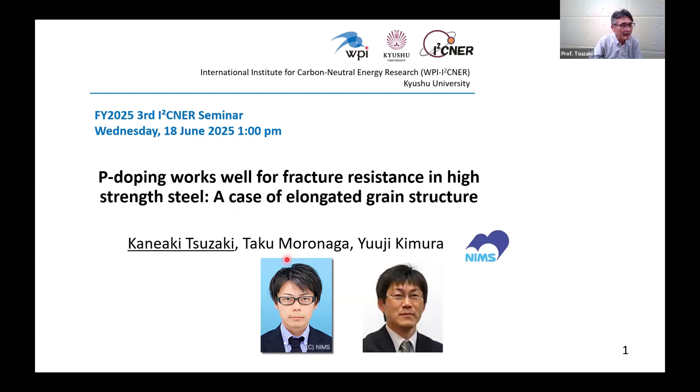The title of my talk today is Phosphorus doping works well for fracture resistance in high-strength steel, a case of elongated grain structure. The co-authors of this presentation are Moronaga-san and Kimura-san. Phosphorus, an embrittlement element in steel, can also be used as an effective element if the microstructure of a steel is controlled. This is the message of my talk today.

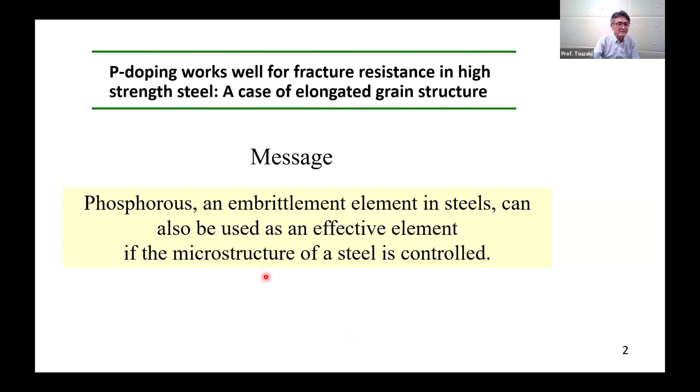Agenda: 1. Background and motivation. 2. Seasoned ideas. 3. Challenging impact toughness. 4. Challenging hydrogen embrittlement. 5. Related Japanese steel research project. And 6. Concluding remarks.

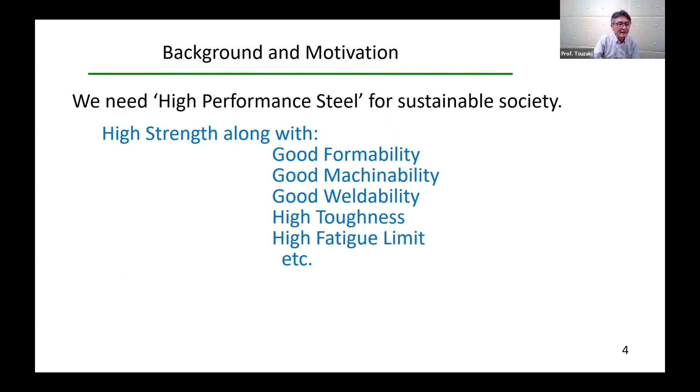Background and motivation. We need high-performance steel for sustainable society. We need high strength along with good formability, good machinability, good weldability, high toughness, high fatigue limit, etc. Today's topic is toughness and embrittlement.

This is a textbook of Professor George Krauss. Chapter 19 of this book discusses low toughness and embrittlement phenomena in steels. On page 382, it is written that toughness is the term used to describe the ability of a steel microstructure to restrict fracture. Embrittlement implies a processed microstructure condition that creates lower toughness than expected of a steel.

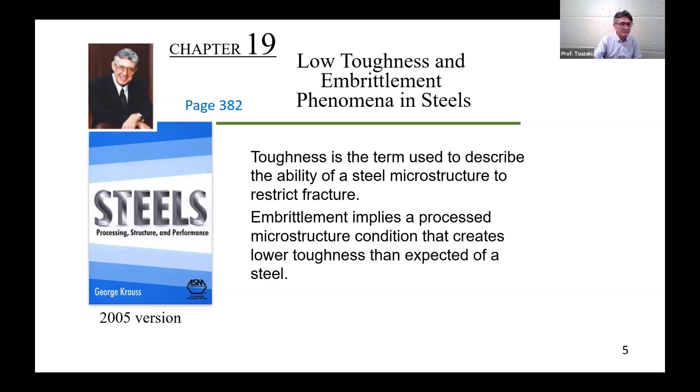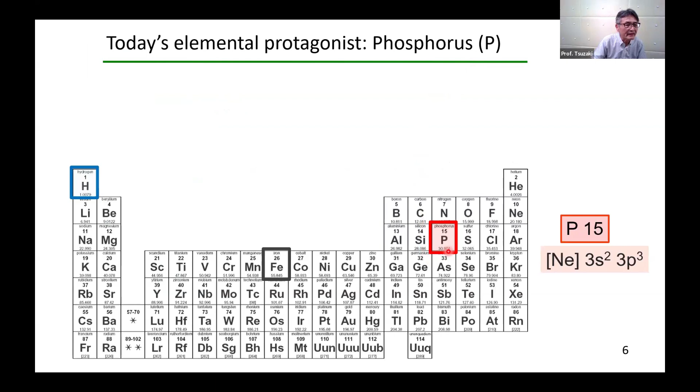Today's elemental protagonist, the main player, is phosphorus. In the periodic table, phosphorus is located below nitrogen. It is well known that phosphorus P, a chemical constituent of steel in JIS standards, is treated as one of the harmful elements affecting low temperature impact toughness, low temperature brittleness, weldability, cold workability, and impact properties. Thus, for example, the maximum P content in JIS SCM 440, AISI 4340, is strictly specified as 0.030 weight percent, 0.054 atomic percent, for safety.

Here is Professor Krauss's textbook again. Chapter 19 describes many embrittlement phenomena. The eighth of these is the embrittlement by P, which is tempered martensite embrittlement. On page 398, we can find a figure like this.

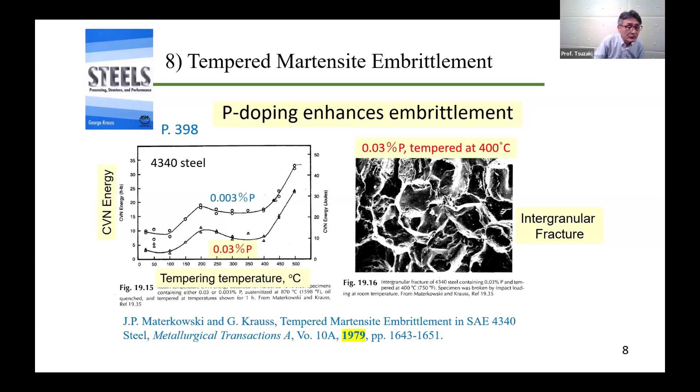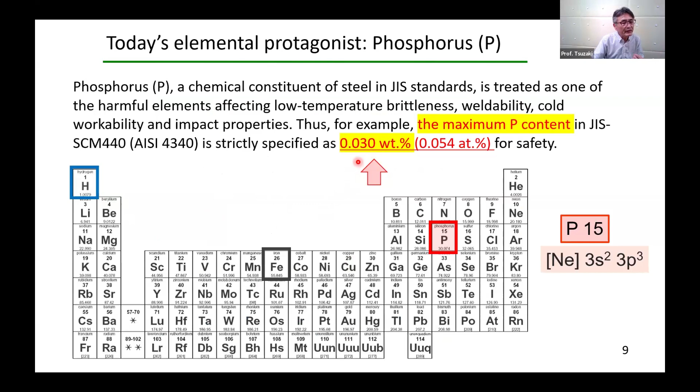For this amount of 0.03% P, if you go back to the two previous slides, you see that 0.03% is the maximum P content in JIS SCM 440, AISI 4340. This fact and the result shown in Professor Krauss's text led me to the following question: how does toughness change when P is greater than 0.03 mass percent?

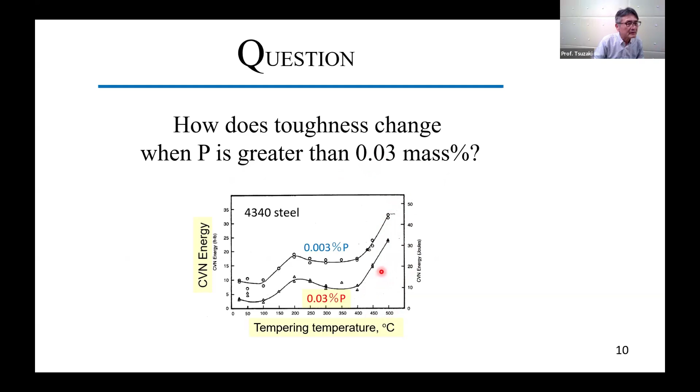I wanted to know the result for high temperature tempering above 500 degrees Celsius, where the impact energy rises. I believe you all would like to know too. So I did. Here is the result. Only phosphorus content was varied in SCM 440. The tempering temperature in this case was 550 degrees Celsius, and the tensile strength was 1100 MPa.

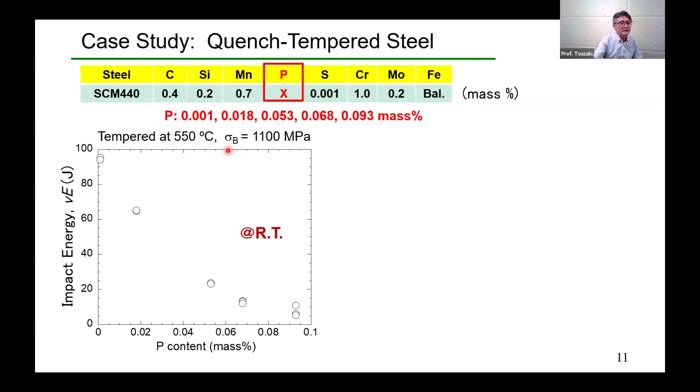The impact energy at room temperature shows more than 90 joule when the P content is 0.001%. And the fracture surface shows dimple fracture. Impact energy decreases markedly with increasing P content like this.

At 0.093% P, almost complete intergranular fracture is observed. Here, I should say that even after high temperature tempering, embrittlement due to P is still pronounced.

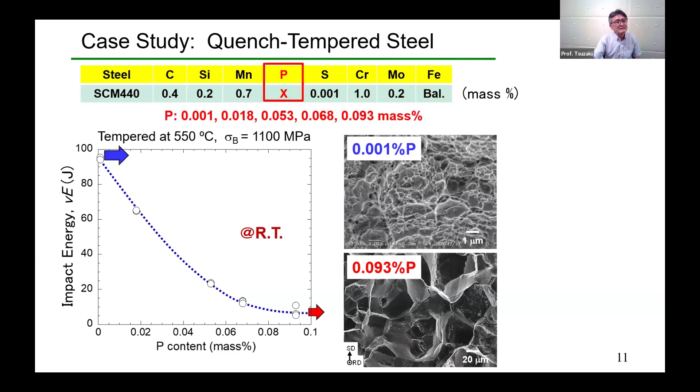We also did an Auger electron spectral analysis to confirm the segregation of phosphorus at grain boundary. In the grain boundary fracture area, we observed about 3 atomic percent P, which is 40 times the average value.

The lower content of P at number 10 and 12 shown in red square corresponds to cleavage fracture region like this. Interestingly, these regions also have a high phosphorus content of 1 atomic percent or more.

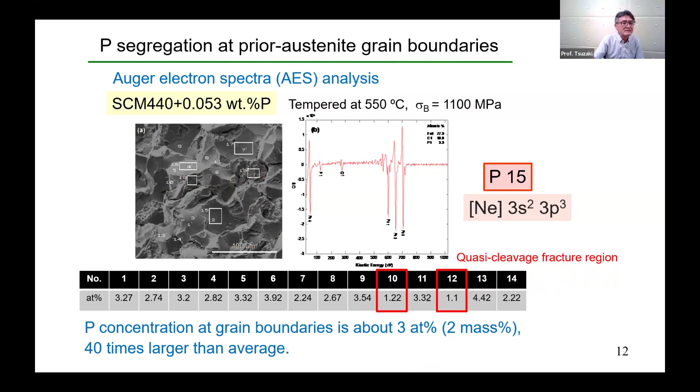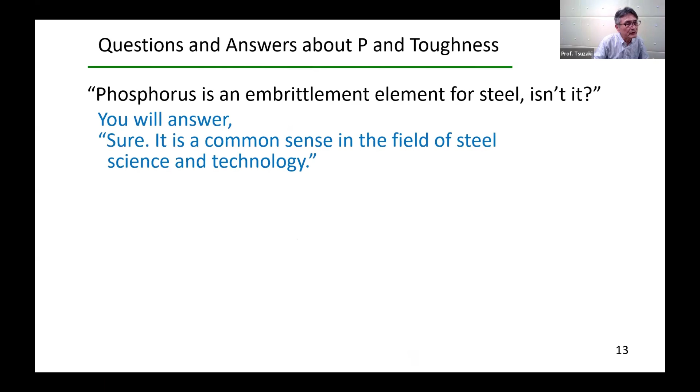Based on the knowledge and background I have described so far, here I'd like to do a virtual Q&A on phosphorus and toughness. First question: phosphorus is an embrittlement element for steel, isn't it? You will answer, sure, it is a common sense in the field of steel science and technology.

Second question: can you make a steel tougher by phosphorus? Your possible answer is no, we cannot. We can make a steel stronger by phosphorus - this is solution hardening by phosphorus. However, toughening by phosphorus is impossible since phosphorus is an embrittlement element.

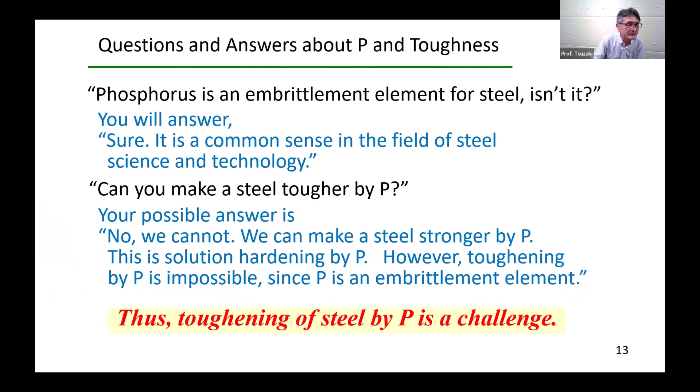Therefore, toughening of steel by phosphorus is a challenge. So it was a long introduction on background and motivation. Next up is theories and ideas: how to improve toughness of a high-strength steel by the embrittlement element phosphorus, P.

Let me briefly describe our scenario according to Professor Cohen's reciprocity diagram. Processing is temp-forming. Structure is ultra-fine elongated grain structure. Properties are high toughness and strength. And performance is safety and eco.

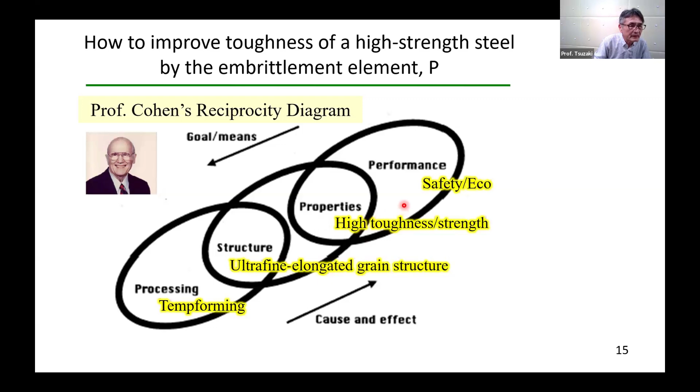Our scheme and idea is in the use of delamination toughening. We published a research study in 2008 with this title: Inverse Temperature Dependence of Toughness in an Ultrafine Grain Structure Steel.

Here are the main results. The steel is 0.4 carbon, 2 silicon, 1 chromium, and 1 moly, and tensile strength is 1800 MPa. The QT material shows a normal ductile to brittle transition with low impact energy values as shown here.

However, for material subjected to temp forming TF, the method of which will be shown in more detail later, the impact energy is higher. And as you can see here, impact energy increases with decreasing test temperature.

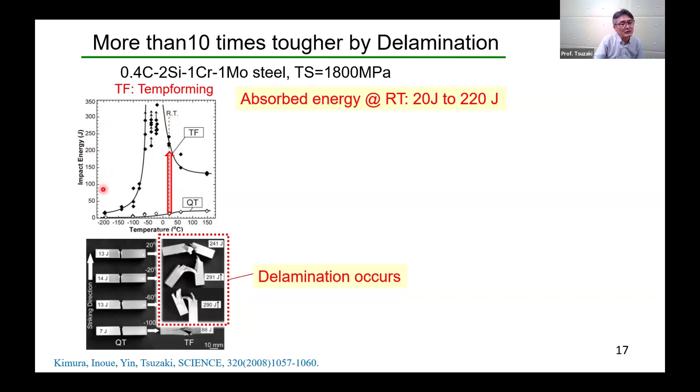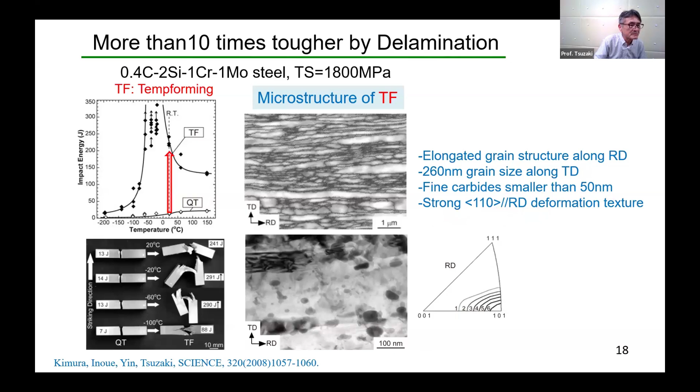We have studied the mechanism of delamination toughening: interaction between weak interface and stress sigma SD, striking direction, that is generated by plastic constraint at the notch root can make delamination.

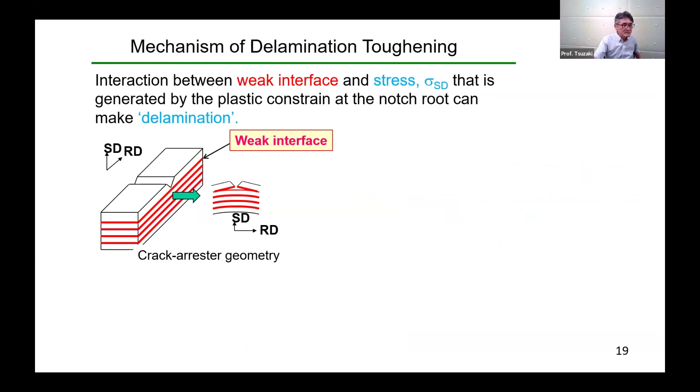When the delamination with a crack arrestor geometry occurs, as shown in the left figure, the triaxial tensile stress state is relaxed toward a uniaxial tensile state, which lowers the DBTT and increases the impact energy. This means that we can use brittle fracture to enhance toughness in ultra-high strength steel with an anisotropic structure.

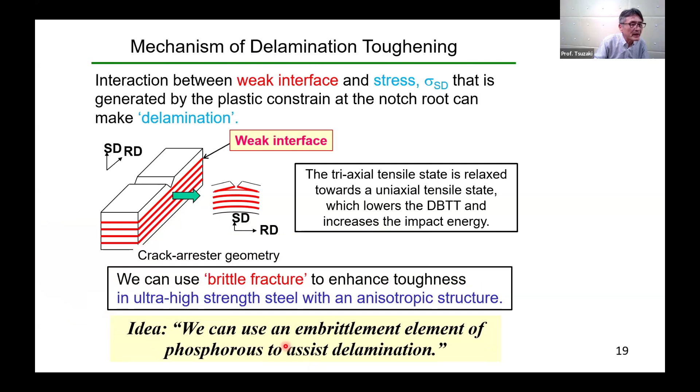What kind of an idea will come out of this? Yes, this idea: we can use an embrittlement element of phosphorus to assist delamination.

Next, the challenge - impact toughness by P-doping is presented. The steel used is SCM440.

Only P content was changed from 0.001, 0.018, 53, 68, and 0.093 mass%. The main process is multi-pass caliber rolling at 500 degrees Celsius, namely warm rolling of tempered martensite.

The total reduction area of 78% produced a bar with a cross-section area of 14 millimeters square, and the bar was finally annealed at 550 degrees Celsius for 1 hour.

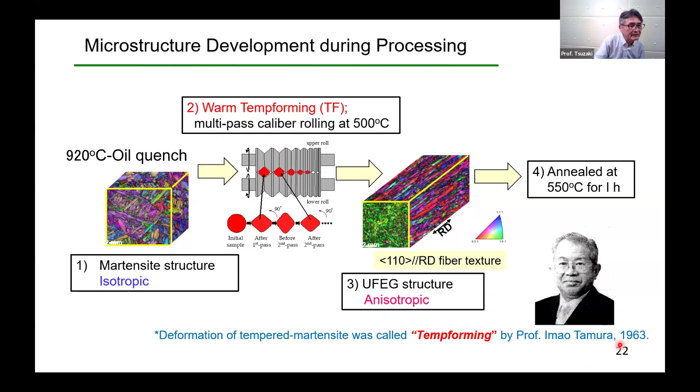In TF sample, elongated fine grain along the rolling direction are seen. Inverse pole figure shows a strong 110 parallel RD fiber texture. The SEM microstructure of TF shows the carbides are spherical and aligned in the RD direction.

As mentioned earlier, the carbides aligned on grain boundary are also a factor in delamination. One thing to note here, although the microstructure are not shown on this slide, P addition up to 0.093% does not show significant effect on microstructure of the QT and TF samples.

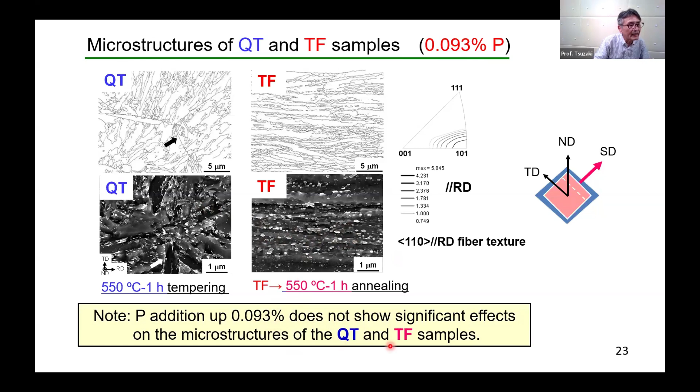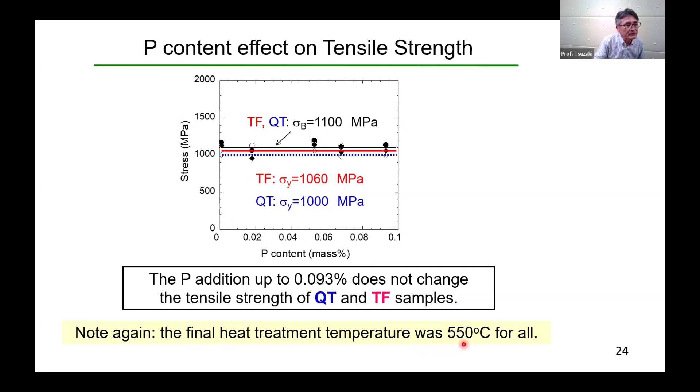Next, phosphorus content effect on tensile strength is shown here. The P addition up to 0.093% doesn't change the tensile strength of QT and TF samples. It is reasonable since the microstructure isn't affected by P doping, as I said in the last slide. Note again, the final heat treatment temperature was 550 degrees Celsius for all.

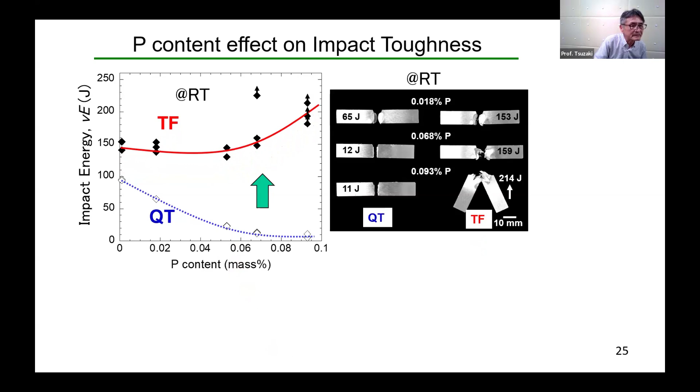Now, this slide shows the result of the impact test that you have been waiting for. As shown in the introduction, the impact energy decreases monotonically with increasing P content in the QT material. On the other hand, in TF material, impact energy increases as P content increases, especially at P content more than

0.05%. In the TF 0.093% P, significant delamination still occurs as expected.

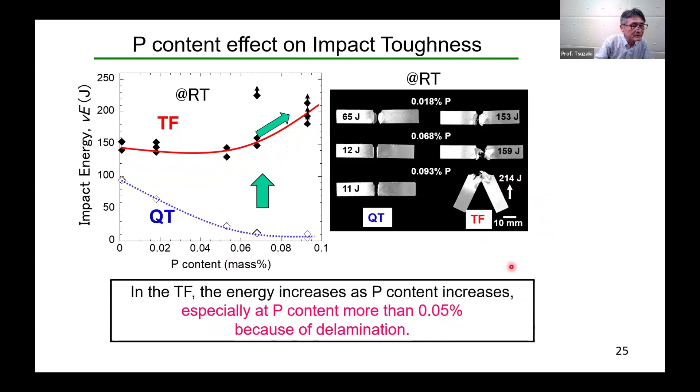Tsujiyama-sensei, is it okay? Yes, no problem. Anything wrong? It's all right? Okay. Yeah.

Let me continue. So this slide, number 26, shows fracture surface of the 0.093% P steel. The intergranular fracture occurred along the boundary of the prior austenite grains of the QT sample.

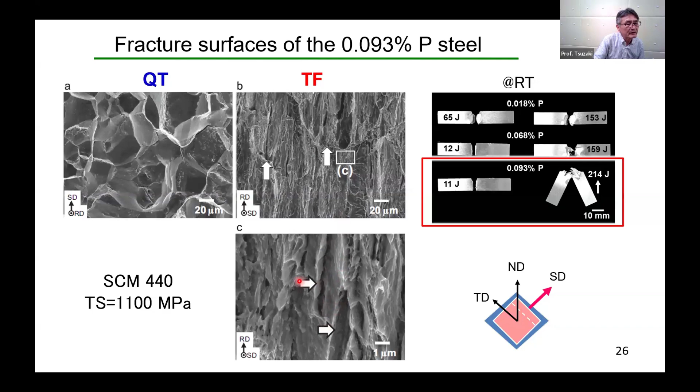In B and C, you can see SEM micrograph of delamination plane of the TF sample. Fracture mode of the delamination planes is characterized as a mixture of quasi-cleavage and intergranular fracture indicated by arrows like this.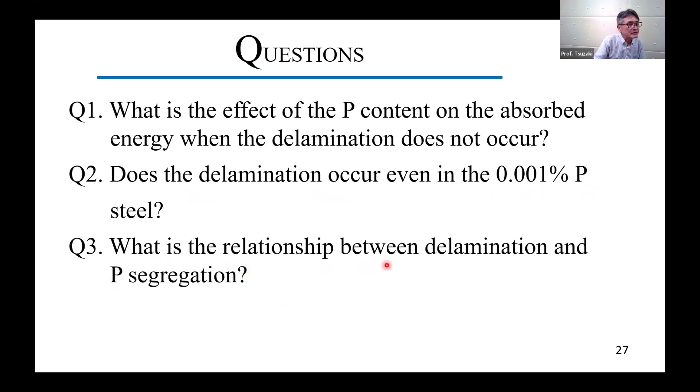Now that you have seen the results so far, you may have these questions. Q1, what is the effect of the P content on the absorbed energy when the delamination doesn't occur? Q2, does the delamination occur even in the 0.001% P steel, high purity steel? And Q3, what is the relationship between delamination and phosphorus segregation?

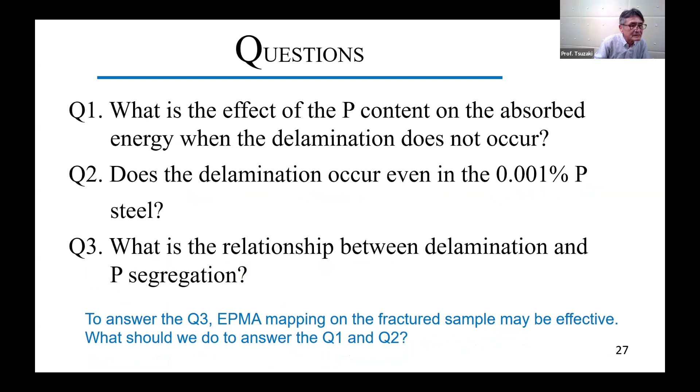To answer Q3, EPMA mapping on the fractured sample may be effective. But what should we do to answer Q1 and Q2? The clue is on the previous slide, number 17. As shown here, delamination doesn't occur at high temperatures and is accelerated at low temperatures.

Therefore, to answer question 1, we can do the impact test at high temperature. And to answer Q2, we should do the test at low temperature. So all we have to do is to get the Charpy impact curve of the impact energy of the TF and QT sample with different P content.

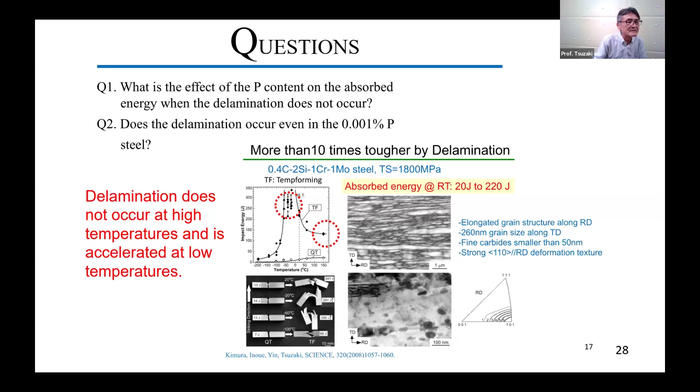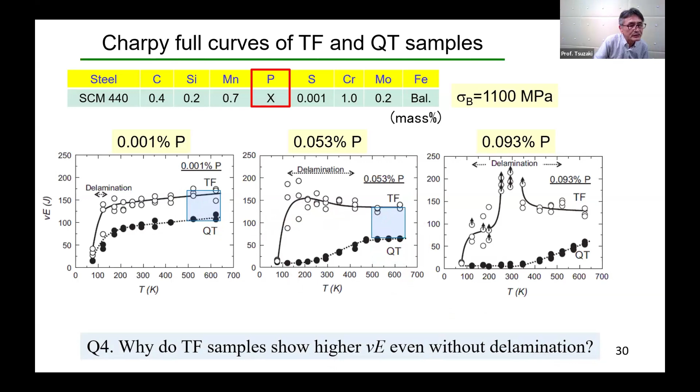This is the answer to question 1. Here, you may have a further question. Q4: Why do temp-form samples show higher energy even without delamination, in the upper shelf portion? I think that the reason must be associated with the strong 110 RD texture and the unique carbide arrangement in the microstructure. I'll further discuss this in the discussion time if you want.

But now we need to concentrate on question 2. Does the delamination occur in the 0.001% P steel? The answer is yes. It was found at low temperature here.

I show you the delamination occurred at -150 degrees Celsius in 0.001% P TF steel. Here, there is not significant segregation of P. So the possible factors for weak interfaces are 001 cleavage plane aggregate, unique carbide arrangement, and maybe also manganese segregation bands.

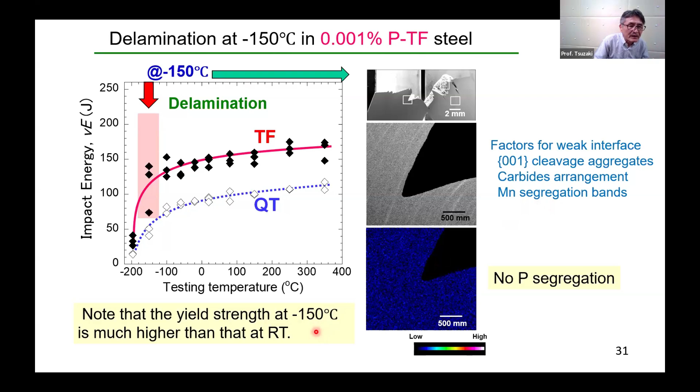I should note that the yield strength at -150 degrees Celsius is much higher than that at room temperature, where the applied stress is the driving force for delamination. I think we have almost solved Q1 and Q2. How about you guys? Okay?

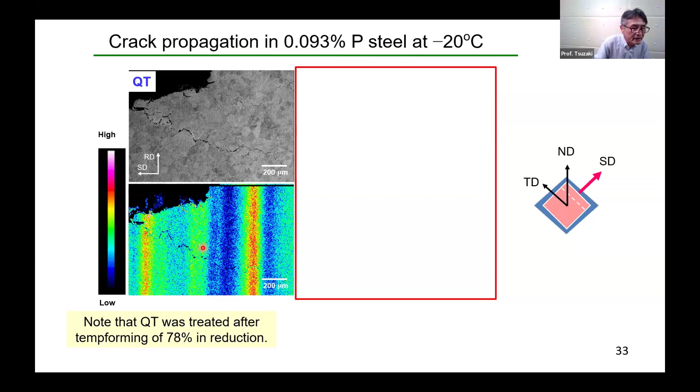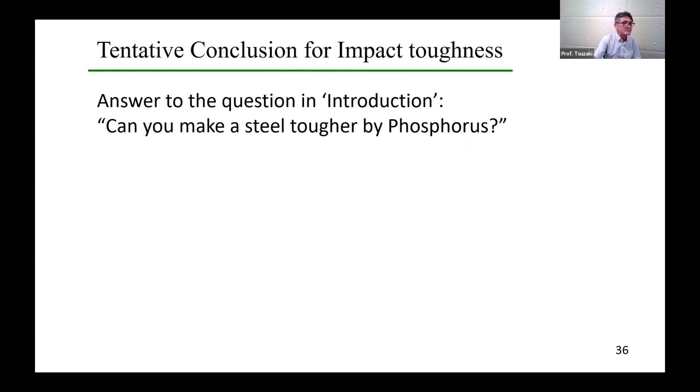So then we make a tentative conclusion for impact toughness, answering the question I made in the introduction: Can you make a steel tougher by phosphorus? The answer should be, yes, we can. We can make a steel stronger by phosphorus through delamination toughening in an ultrafine elongated grain structure. This is a case study of positive use of an embrittlement element, phosphorus, in steel through microstructure control.

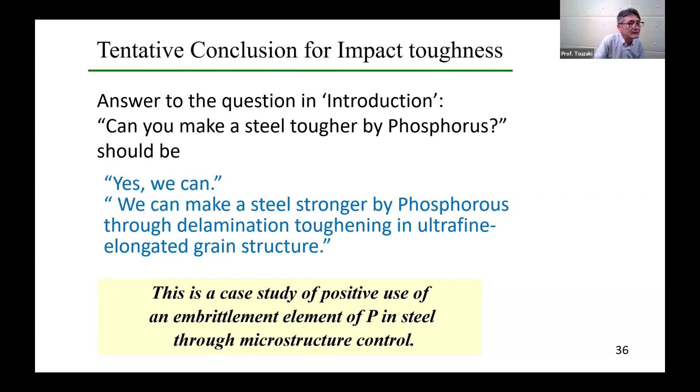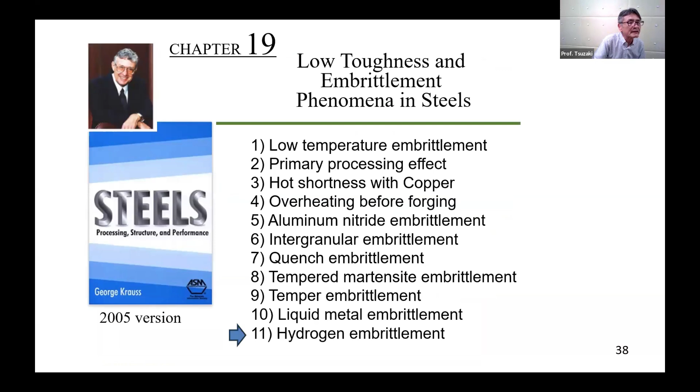Since there is an incubation time before failure, this fracture was named delayed fracture. It had been discussed that the incubation time to fracture corresponds to the time required for hydrogen atoms to diffuse and accumulate to a critical value for failure in the stress concentration region at the notch root.

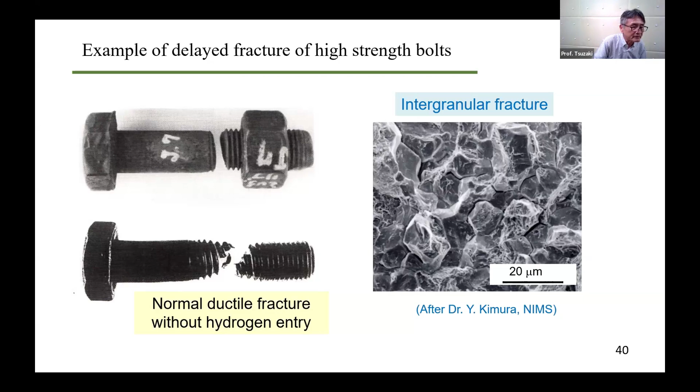We have ideas for overcoming hydrogen embrittlement. The first is again tempforming and the ultrafine elongated grain structure.

In 2012, we reported that the TF sample shows higher strength than QT in the whole range of hydrogen content up to 3 ppm, as shown in this figure. The result was obtained in this high carbon, low alloy steel with a very low level of phosphorus and sulfur.

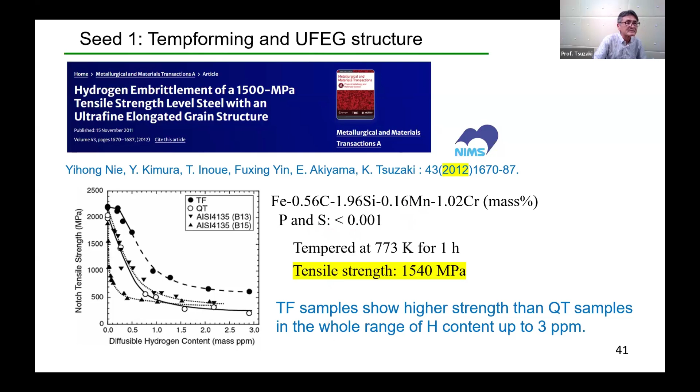What I think is important about their result is this: delamination cracking occurs at the notch root, as shown here in C. Please look at the EBSD inverse pole figures in A and B, where delamination cracks propagate along the pearlite block boundary, namely the boundaries between the red and blue regions shown in B.

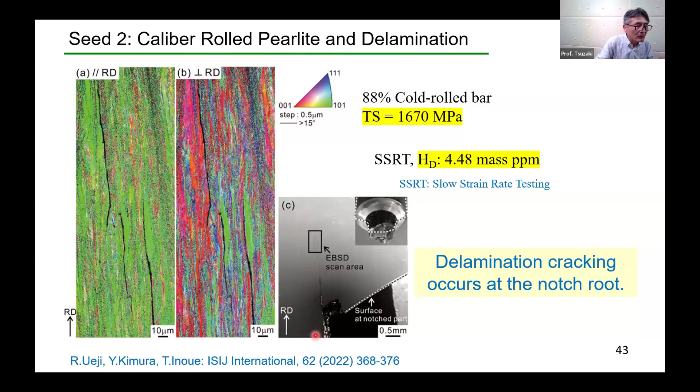This delamination should be reducing the stress concentration at the notch root, which is good for hydrogen embrittlement resistance. This brings me to the idea I think you all know what my idea is. Yes, my idea is P-assisted delamination for delayed fracture.

In this study, we used the same SCM440 with two different P contents. We used only two levels of P: 0.001, the high purity one, and 0.093 mass percent, the highest P content. The tempforming process is exactly the same as that of the first half of my presentation today.

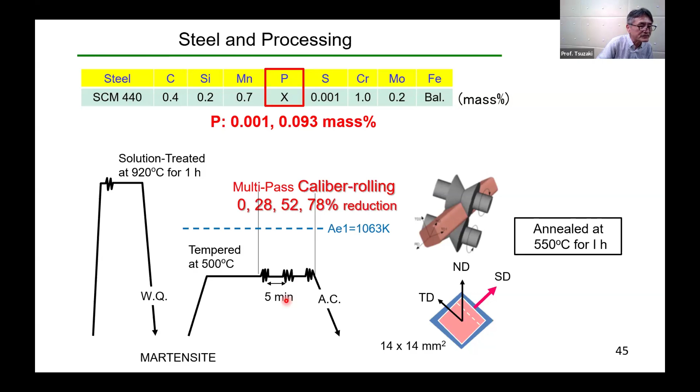This is the experimental method used to evaluate the hydrogen embrittlement susceptibility. It is the SSRT test we always use.

First, hydrogen charging for 164 hours with these solutions with various current density. Second, a slow strain rate test was performed at a cross-head speed of 0.005 millimeter per minute. Finally, we did thermal desorption spectrometry, TDS, at a heating rate of 100 degrees Celsius per hour. Hydrogen desorbed up to 300 degrees Celsius was regarded as diffusible hydrogen, HD, which caused hydrogen embrittlement.

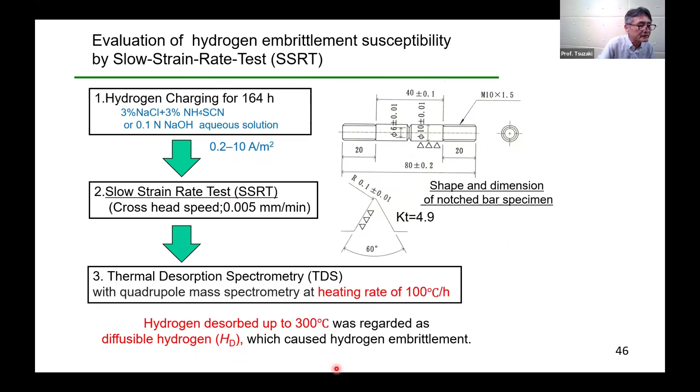This slide shows the result for the notch tensile strength versus diffusible hydrogen content. In low-P QT steel, shown in black, the notch strength decreases from 1800 megapascal to 400 megapascal as hydrogen content increases, like this.

The notch strength of high-P QT steel in blue is lower than that of low-P QT steel in black. However, high-P TF temp-formed steel in red shows higher notch strength than the QT steels. The strength is still higher than 1000 megapascal, even at a high hydrogen content of 3 mass ppm.

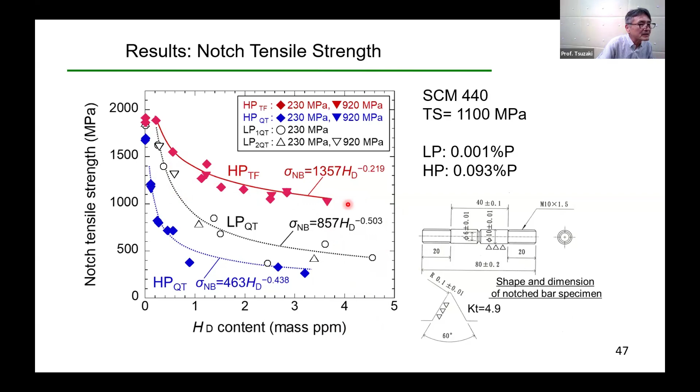This is the result of SEM fractography of the QT sample. In QT, 0.093% P steel, grain boundary fracture was observed at the crack initiation site, even without hydrogen charging.

On the other hand, in QT, 0.001% P steel without hydrogen charging, although it isn't shown here, dimple fracture was observed in all regions of the specimen. As hydrogen content increased to 1.4 and 2.5 ppm, the ratio of quasi-cleavage fracture and intergranular fracture at the crack initiation site increased, as shown in D and H.

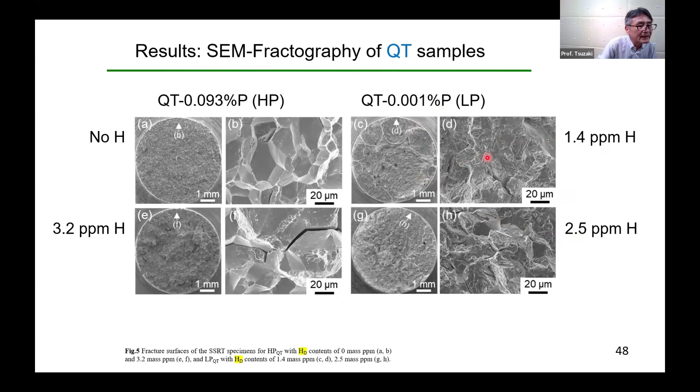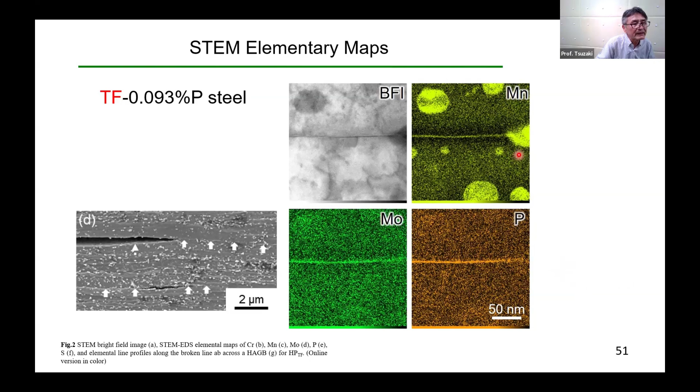I believe it is clear that phosphorus segregation at the grain boundary is related to delamination fracture because of loss of cohesion. However, the effect of moly and manganese segregation are still under discussion.

Now, at this stage of my talk for the second topic, you may all have this question, Q5: what are the hydrogen intrusion properties of TF steel? This is a very reasonable question since it is essential for discussing hydrogen embrittlement resistance of a steel.

To answer Q5, we performed the immersion test to evaluate hydrogen intrusion. The test was done at 30 degrees Celsius with a solution here. This condition simulates the atmospheric corrosive environment in Okinawa, Japan. The hydrogen content is lower in high P steel, 0.093% P, indicating that P doping is effective to suppress hydrogen intrusion.

I believe this is maybe due to the intergranular segregation of P.

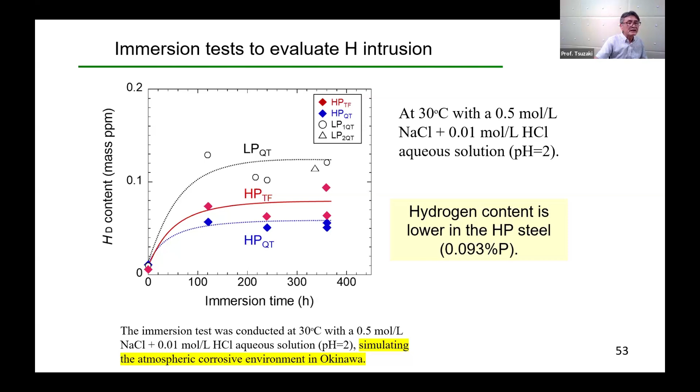Now let us examine the relationship between the amount of hydrogen intrusion from the environment, left figure, and the notch tensile strength, right figure. Even if we take a safety factor of 5 for hydrogen intrusion, hydrogen intrusion of 0.5 ppm HD, a design strength of 1500 MPa can be used for HPTF steel. Of course, further research is needed, but I think this design guideline is very interesting.

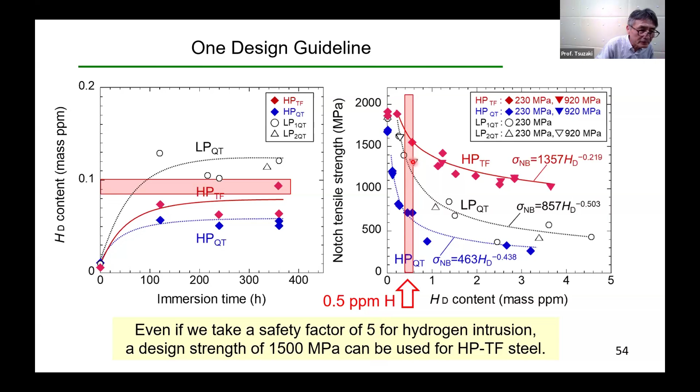Now, the tentative conclusion for HE resistance: answer to the question in the introduction. Can you make the steel tougher by phosphorus? Should be, yes, we can. We can make a steel stronger and tougher by phosphorus through delamination toughening in ultrafine elongated grain structure. This is again a case study of positive use of an embrittlement element, phosphorus, in steel through microstructure control.

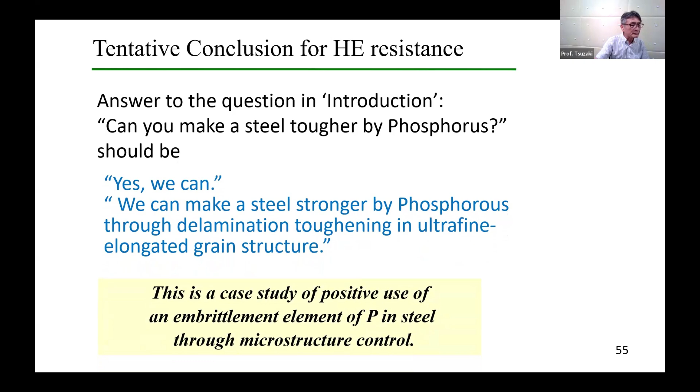Let me introduce briefly the related Japanese steel research projects before making concluding remarks. There are 2 projects that I wanted to introduce.

The first one is JST CREST, Creation of an Innovative Function of Intelligent Materials on the Base of Element Strategy. The research period was from 2010 to 2017, a completed project, and the research supervisor was Professor Kohei Tamao. In this CREST program, there was a research project entitled Light Element Strategy in Advanced High-Strength Steel, and the leader was Professor Tadashi Furuhara.

The aims were to create new principles in the design of high-strength and high-ductility toughness in steels by understanding the fundamental functions of alloying elements. One of the tasks was the use of localized alloying elements at defects, an important factor of solute-defect interaction. In this research task, I have performed the p-doping study to improve impact toughness that I presented today.

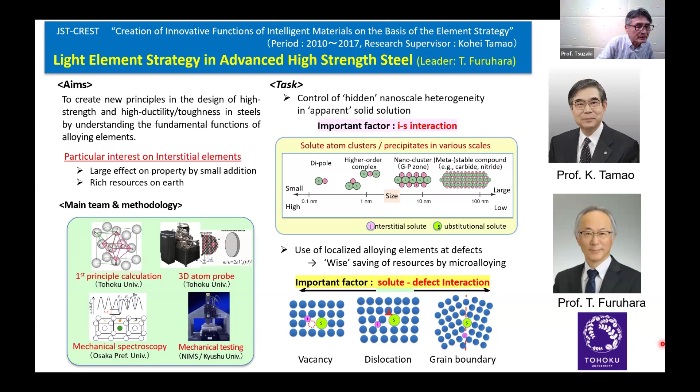I thank our leader, Professor Tadashi Furuhara, and all team members for their cooperation at the time. This is the other representative output of the CREST project except for the B-doping study. I will not explain the content here, but will leave it on the video slides for your reference. If you are interested, please take the time to watch the video later.

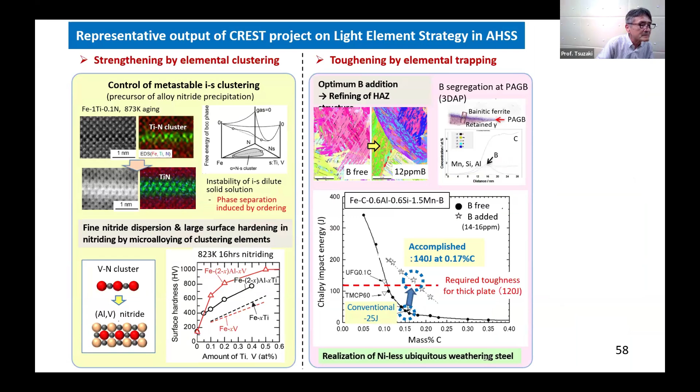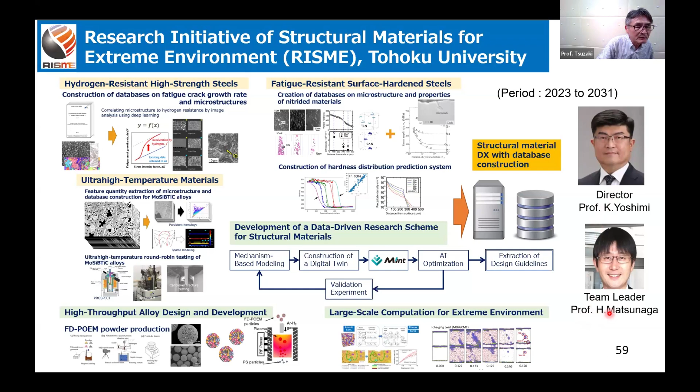The team leader is Professor Hisao Matsunaga, Kyushu University. The second B-doping study we presented today was done as work of this material challenge. I thank Professor Yoshimi and Professor Matsunaga and all team members for their collaboration.

This is one of the distinctive activities of this project: collaboration with industry, an academia-industry consortium for utilization of RISME data, with 17 companies in total now. Please go to the RISME website if you are interested.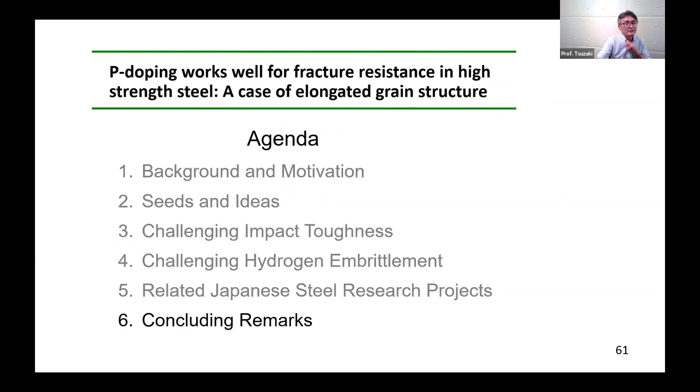Now, this is the time for concluding remarks. As one of the concluding remarks I would like to make, here I'd like to mention the most interesting future research for me.

Since the delayed fracture experiment of TF material was done only with 0.093% P steel, I have a question and interest: how does the delayed fracture strength of temp-formed material change with the P content?

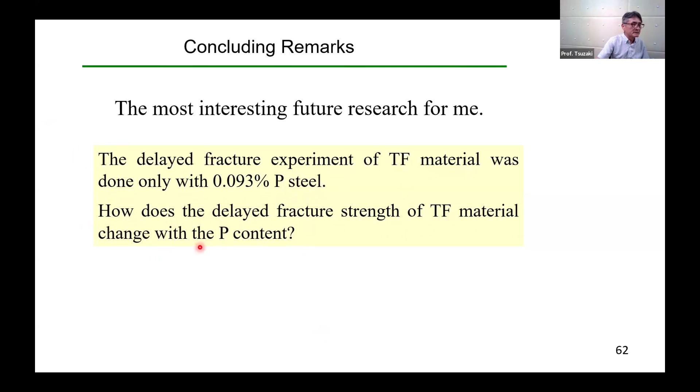In closing, I'd like to present my message again: phosphorus, an embrittlement element in steel, can also be used as an effective element if the microstructure of the steel is controlled.

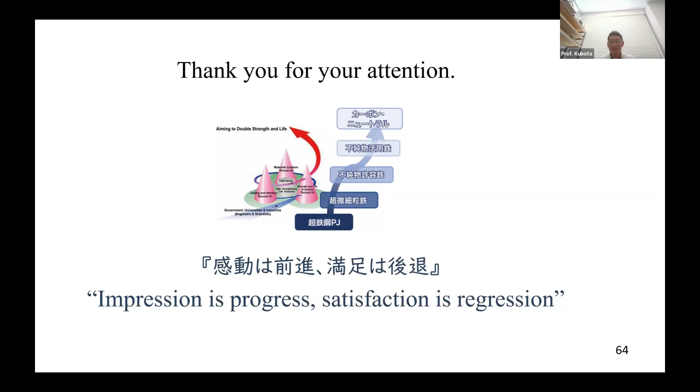Thank you very much, Tsuzaki sensei, for your very interesting talk on the P-doped steel. I have a question: in your experiment, the microstructure is controlled by thermomechanical treatment, but the loading condition is also controlled, specifically the loading direction, to achieve good results. If the lamellar material receives loading along the lamellar direction, what happens? I expect the toughness is significantly reduced. Am I correct? Yes, you are correct, absolutely. This is the anisotropic microstructure.

Okay, thank you very much. Actually, if you tensile the specimen along TD or ND direction, in series connection on the phosphorus band, the specimen fractures just after the yield point, very brittle.

Okay, thank you very much. Also, today your talk is primarily related to impact test, but how about the fatigue properties of this material? Is it also improved?

Professor Kubota, I'm sorry but I can't remember completely. We did some research on fatigue. As for the effect of microstructure on the fatigue limit region, I mean the low stress region, high cycle fatigue and low cycle fatigue, the effect is different.

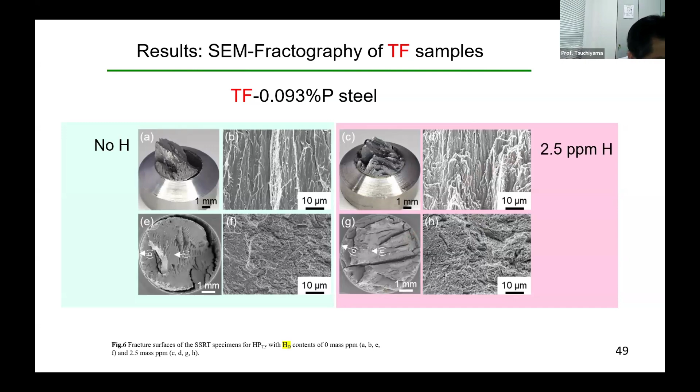Direction of elongated grain - you can see these steps, right? On these steps you can see dimples in some portion. Let me see the EPMA mapping, no, not here.

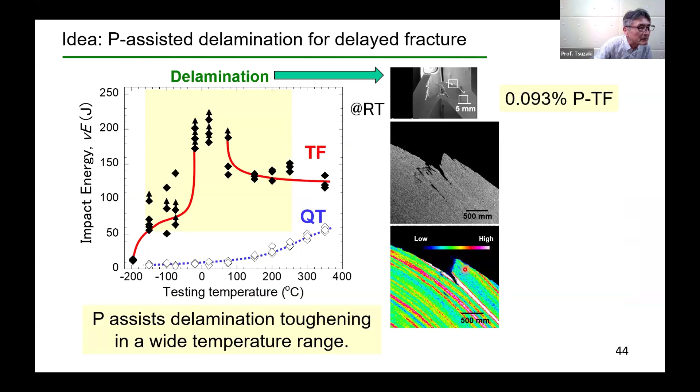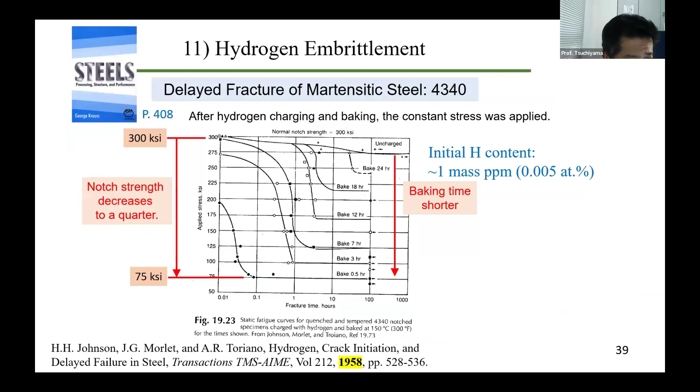This is here, let me show the case of impact toughness. So then, see, here there is a step, right? Yeah, something like that, so here's another step here, right?

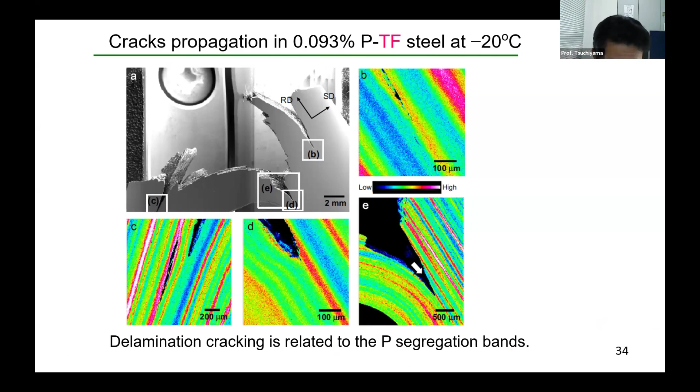But Professor Tsuchiyama, please understand that the texture is 110 parallel to RD, deformation texture. Rolling direction you have 110, so no 100, no cleavage plane normal to RD. So all planes normal to RD are ductile. Of course there are some cleavage fracture surfaces in these steps also, but in some part we can see dimples. Very interesting, even in the high phosphorus steel.